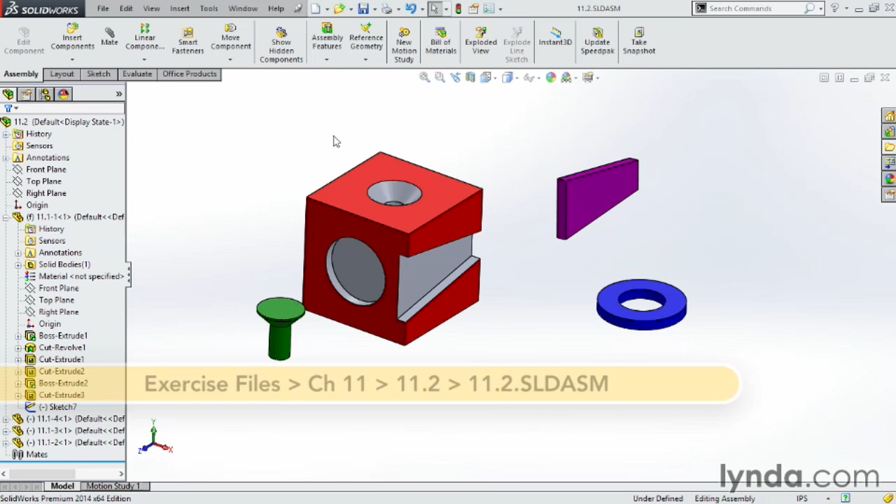The first step is to make sure we have all the required parts in the assembly. You don't need to bring all the parts in at once, but sometimes it's handy to have them all available. Secondly, aligning the parts close to their desired location will help connect the parts later when we start getting into mates.

Let's take a look at all these components here and make sure we have everything we need. If you don't have all the components in the assembly at this point, you can always go back and add them in.

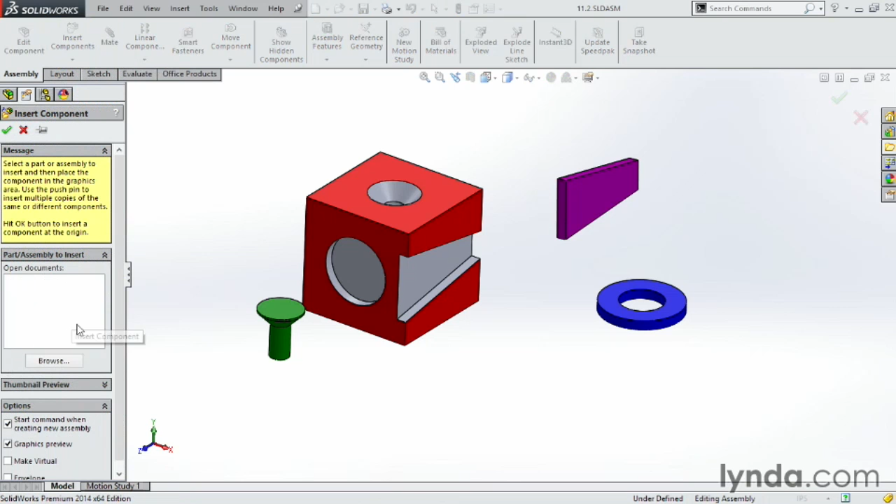You can come up here to Insert Component, and any available parts that happen to be open in your file system will be listed here, or you can click on Browse and import any other files you might want to have in the design.

In this case, I'll click on the first part, click Open. You can see it is attached to my tooltip. If I wanted to place another one of these same parts in the assembly, you can have as many of the same existing part as you'd like. When you're happy with that, click OK, and it'll place it in the assembly. It's a quick way to add new components.

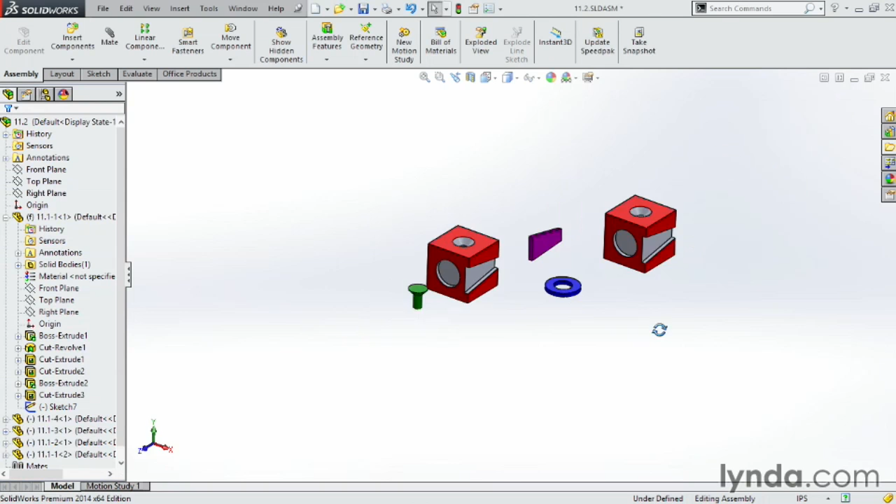Then what I'd like to do is line everything up so I can easily see how to put these components together. So in this case, I'm going to drag this over here, but notice I'm dragging it in 3D, so if I spin it around, you can see it's actually quite a bit higher.

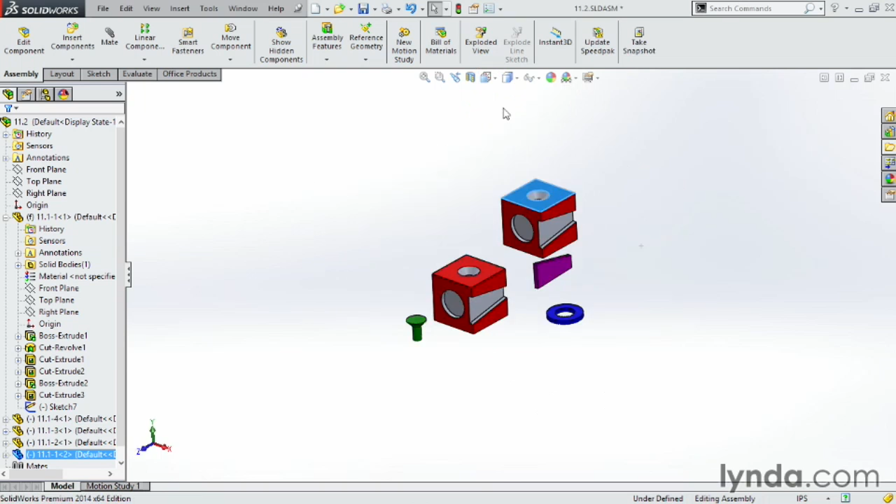So sometimes it's handy to look at this in a different view mode. You might want to look at the top of the parts and align them like this first, then switch over to a different view, maybe look on the side and bring these down. This quickly allows you to move things around in the correct orientation.

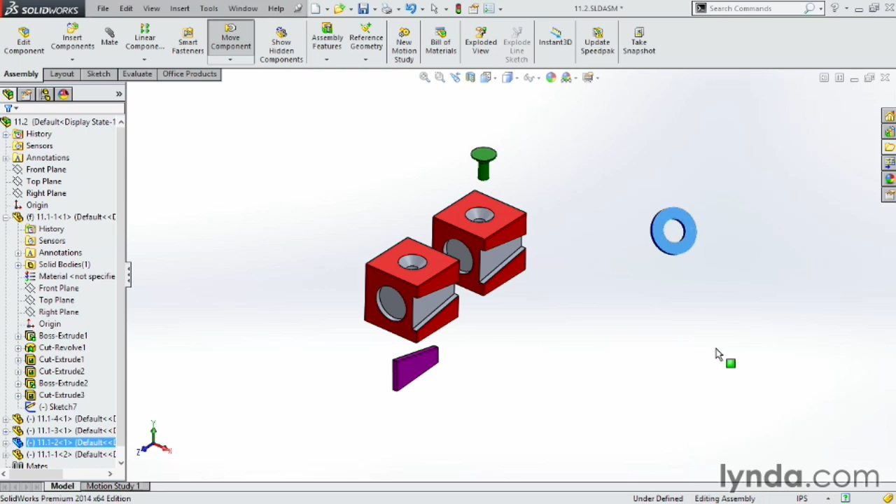Next, you can see I have this component here, and I like to have it close to this slot over here, so let's put it over here. And this little green pin looking thing, let's put that up above. And we have this little washer here, let's spin that around holding down the right mouse button to get it close to the right orientation.

It doesn't have to be perfect. I'm going to bring that around and place it close to the end of where this other pin is. Now we've got things fairly close, but again, we might want to move these around a couple times to get them a little bit closer.

That's the key to building assemblies correctly the first time: getting the components in there, knowing what they are, what they're supposed to be doing, and how we want to mate them together.

Also, I want to point out you can turn on and view sketches, planes, axes, or any of these other viewable items here through this list, so you can easily locate the parts.

For instance, if I turn on origins, you can see the origins of all the parts. If I go back and turn it off, you can hide that.

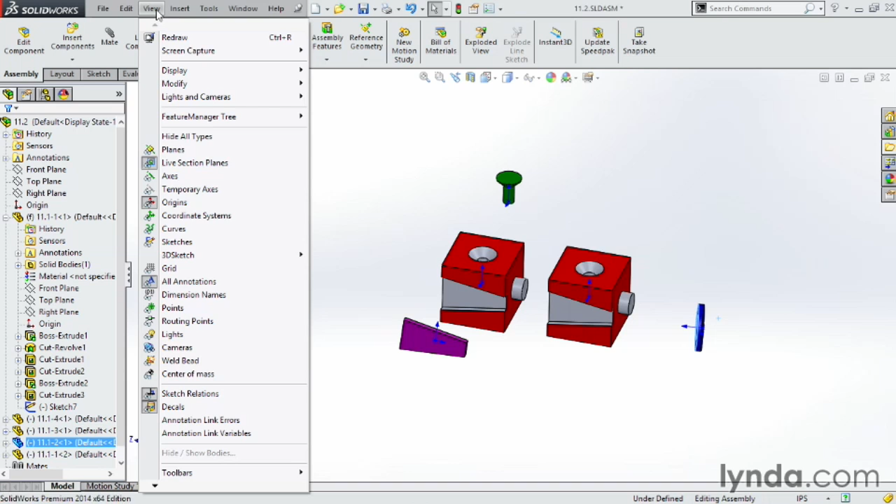You might also want to use the planes to mate one component to the next. Notice each individual component, if you expand it out, has all the original planes you started with, plus whatever features you used to create the part. So if I go to the front plane, I could say, I'd like to show that plane.

If you don't see it right away, more than likely up here at the top under View it's not turned on, so make sure you're turning on planes, and then when I turn it on under the View palette, I'll be able to see it.

Again, if I go to the right plane and turn that on, it'll automatically show. Same thing with a component like this: if I open it up, I can click on the front plane, click Show, and because these components are the same, it shows on both of them.

Those are the first steps in getting ready to build an assembly, and next we're going to be doing some mates. The steps laid out in this video will be repeated in every part of every assembly. Getting the parts laid out well will help you get your model assembled quickly and with fewer errors.